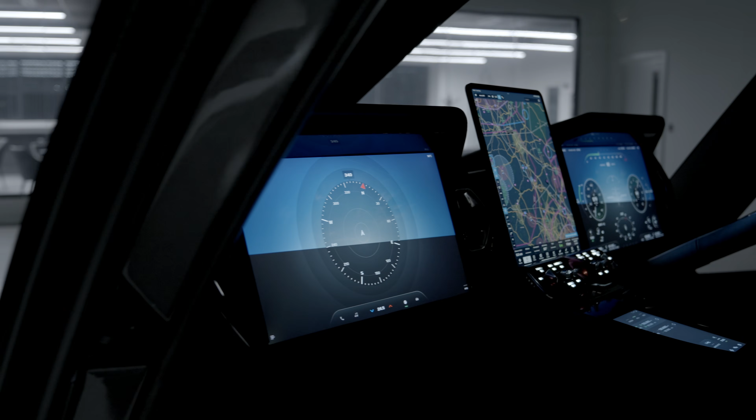Our beautiful HX50 makes you want to fly, and by manufacturing everything in-house, we make it affordable so you're able to fly. Together, we're creating a general aviation renaissance. We call it GA 2.0.

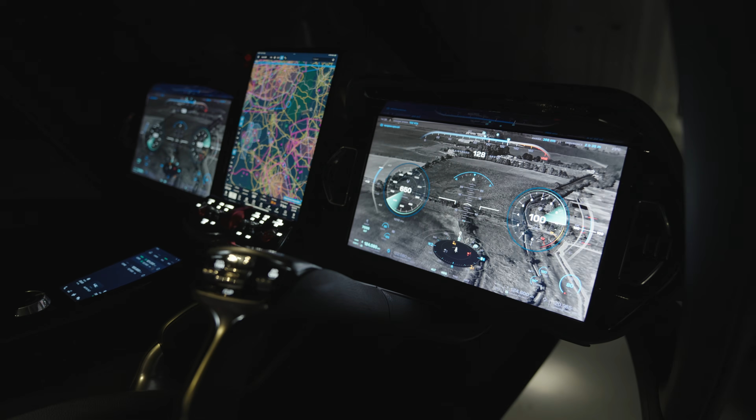For you, it means a breathtakingly beautiful new aircraft, ready for sustainable aviation fuels and connected for the modern world. Our all-new ownership operating system supports every aspect of HX50 ownership, from in-house insurance to comprehensive warranties and power-by-the-hour maintenance to pilot training and active safety management, keeping you and your family safe.

Together, we've built the Hill Global Community, a place that provides easy access to the very best that the helicopter lifestyle can offer, globally and amongst new friends. Clearly, the scale of this task is vast.

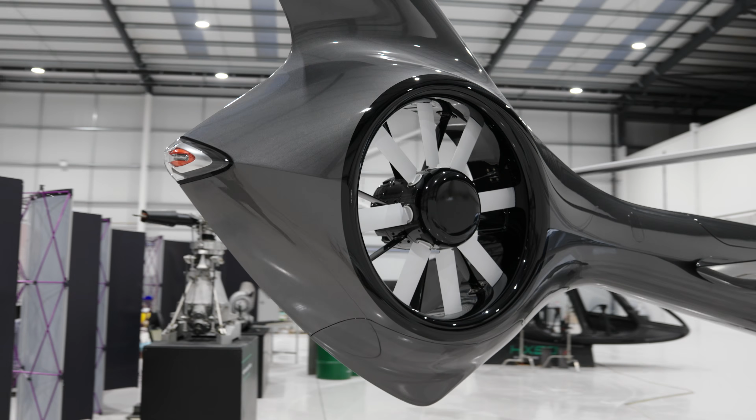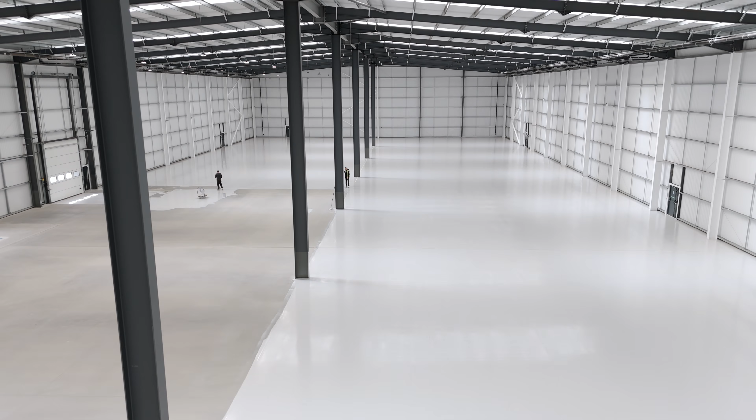Create an all-new class-leading helicopter. Create a pioneering, affordable turbine engine. Create an all-new digital cockpit. And then create all of the processes and all of the infrastructure needed to manufacture every single part. Then build it, test it, and approve it. Tonight, we'll showcase all of the progress from across the program on how we're delivering on each of those objectives.

Producing a next generation turbine engine is a very big deal, but not because it's difficult. It's because it's absolutely crucial to being able to deliver next generation light aircraft at commercially viable prices.

Consider this: there's less than £10,000 of expensive raw materials in an engine of this size and type. And the equipment to make these components has never been more readily accessible. And we have it all right here at PC1.

Sure, these machines are complex and extremely highly strung, but the design, analysis and testing equipment and the knowledge that we have available today right here at PC1 far exceeds what the guys that did this originally back in the 60s, 70s and 80s had available to them.

That's not to downplay the difficulty of the task. This is difficult, this is complex, this will take time. But before we even start, we know that this has been done before. We know how to make this work.

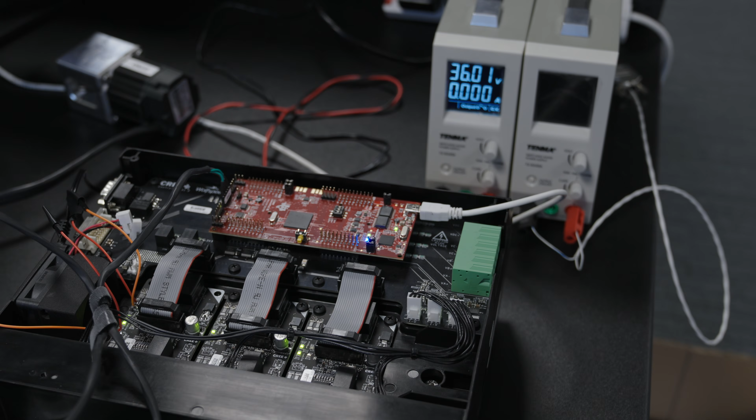Unlike traditional engines, the GT50 uses a high-speed, high-frequency, high-voltage direct drive starter generator unit. This unit consists of two groups of components: the mechanical assembly, which includes the rotor, the stator and the casing, and then the power management unit, which is all the electronics, hardware and software that control and operate the device.

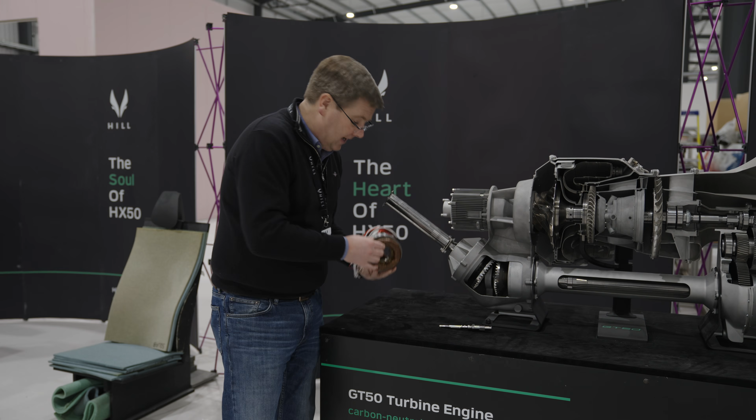We've now completed the prototyping of the drive shaft. This is the stub shaft that sits on the end of the gas generator and drives the rotor of the starter generator. And then also the stator and windings, so the laminations, the windings, and the wire terminations that come out of the back of it.

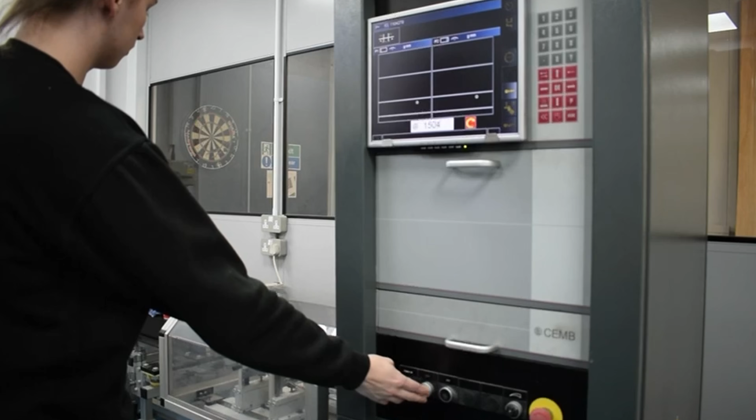And with those in hand and the final casing currently on the 5-axis machine, it's time to assemble it and test it. Given that the starter generator runs at 50,000 RPM, it's important that the system is both statically and dynamically balanced to ensure smooth running and avoid harmful vibration.

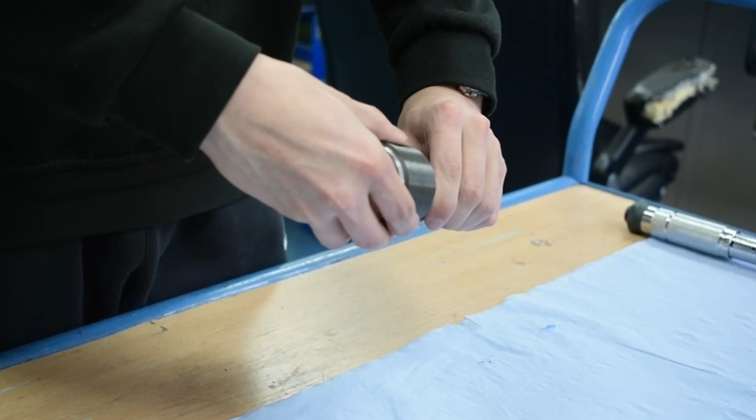In order to do this, when we designed the rotor, we built additional areas of land on all of the rotating parts that can be subsequently machined away as the system is both statically and dynamically balanced prior to assembly and use on the test rig.

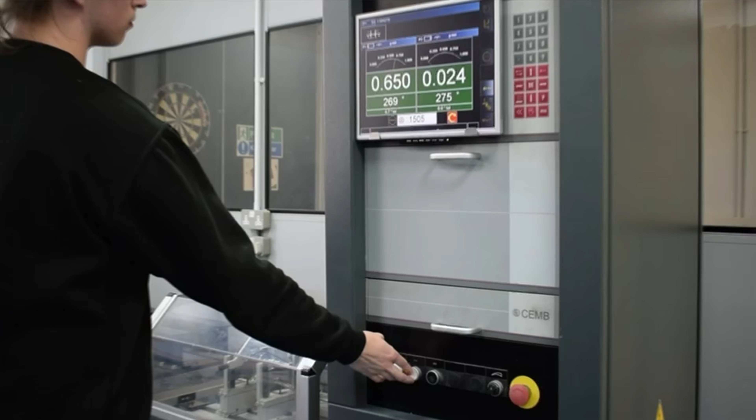With the rotor balanced and the stator electrically tested, the system can be assembled with its casing and connected to its brain, the PMU. In parallel with the development of the flight hardware, we've also been designing and commissioning the specialist test equipment necessary to test and qualify the system, and then building a lab around it.

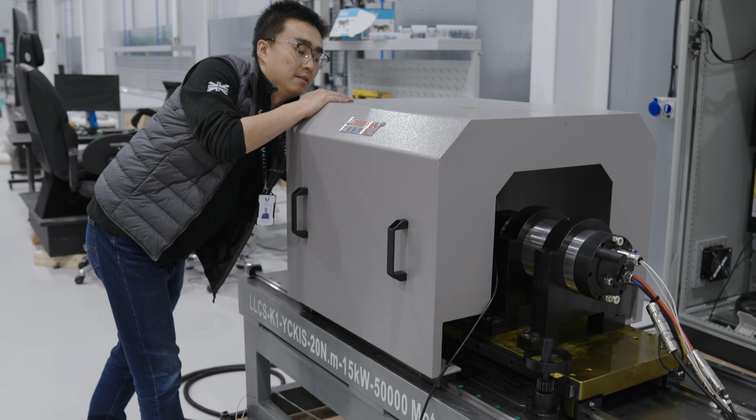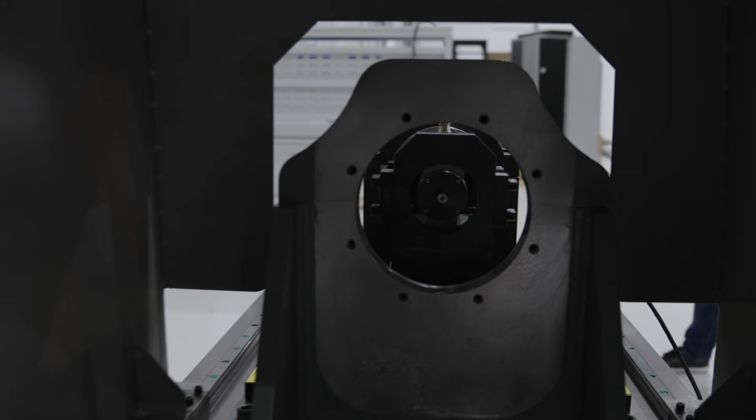And here it is. This is our fully commissioned high-speed test rig, which is about to start testing the motor and generator functions of both the mechanical and electronic hardware of the starter generator.

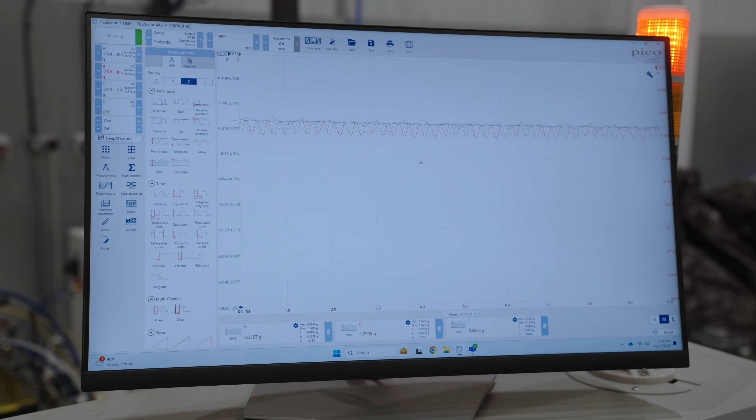This system allows us to prove every element of the performance and reliability of the starter gen across a wide range of operating conditions. Over the course of the next 2 weeks, we'll be mounting the first prototype starter gen system on the test rig and running the system throughout its entire performance envelope.

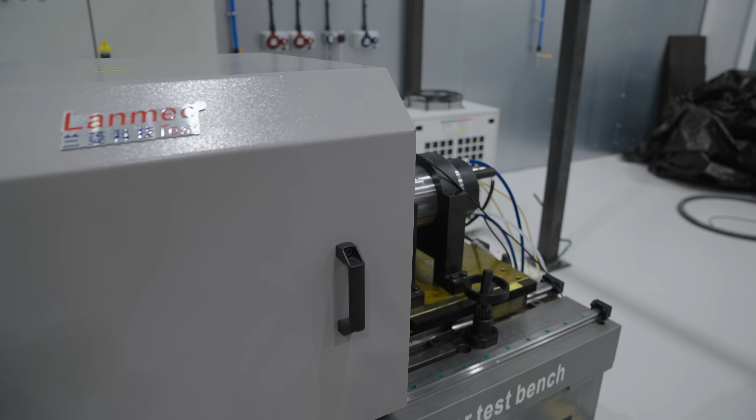This major milestone marks the first module of the GT50 engine on the test bench and working. Much of the time to date on the GT50 program has been spent developing the core elements of turbomachinery, because these are the elements that consume the most technical resources and take the most effort in manufacturing, process development, and infrastructure development.

With these elements of the engine now maturing nicely, we've turned our attention to developing some of the ancillary systems that are also required to make the engine function properly. If you look at the front of the engine and the general state of dressing of the engine, you'll see much more equipment mounted to the front and around the engine to serve the various systems on board. Let's start by having a look at the lubrication system.

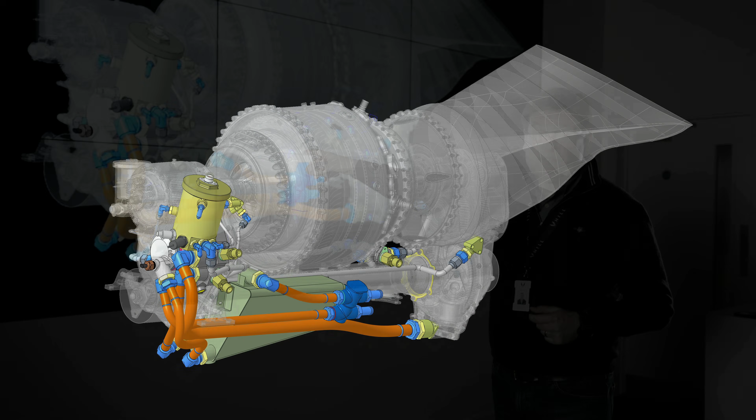Looking at the front of the engine, you can now see that we've added the lubrication system hardware to the accessories module. At the front of the engine, you can see the yellow filter body, the oil pump tucked in behind it, the oil distribution and scavenge lines, and then the oil tank at the bottom of the engine.

The filter body at the top contains multiple functions. It acts as the oil filter itself. It has the oil filter impending blockage warning flag, the pressure relief valve, and also the oil-fuel heat exchanger, which cools the returning oil and heats the fuel prior to injection into the engine.

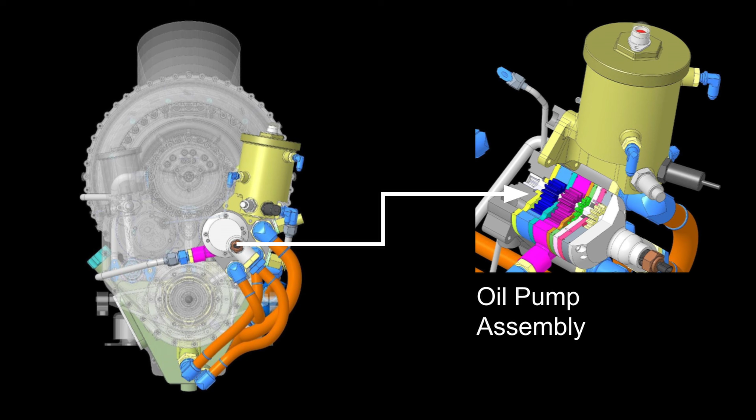When you look across at the oil pump just below the filter body, you can see we have a 4-chamber gear pump, which provides one pressurized line of oil to distribute it to all of the injector nozzles and jets around the engine, and then 3 separate scavenge lines that pull the returning oil and oil mist back from various locations within the engine and into the filter body.

The oil tank itself is conveniently located at the front lower side of the engine and contains around 5 litres of oil, which is enough for all reasonable operations.

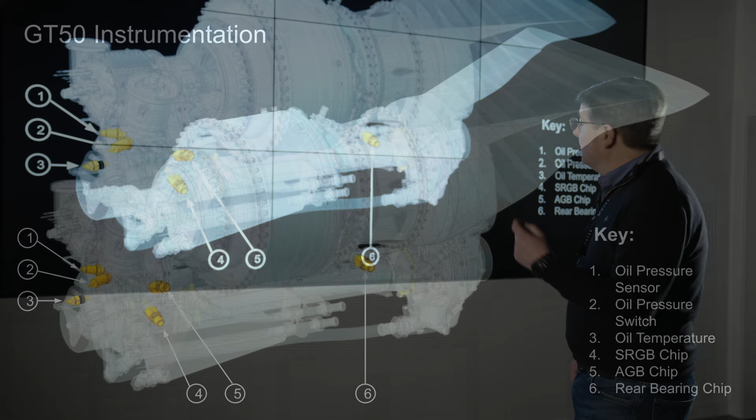In addition to the lubrication system hardware, we've also now integrated the key sensor elements for the control and instrumentation system. On this image you can see the oil pressure sensor, the oil pressure switch, oil temperature gauge, the speed reduction gearbox chip indicator, the auxiliary gearbox chip indicator, and the rear bearing chip indicator as well, all conveniently located around the engine.

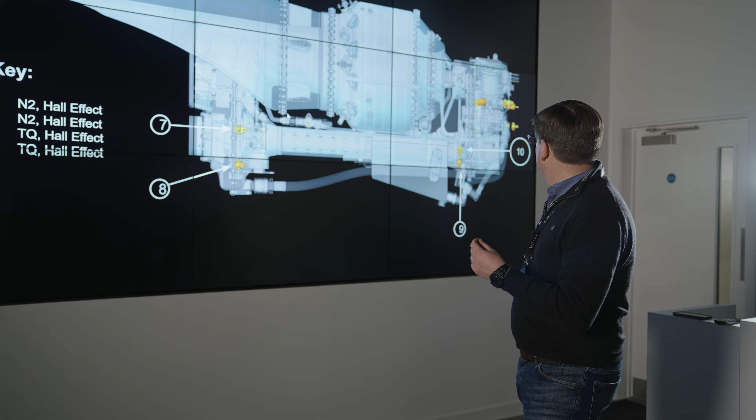In addition to this, we've also got the Hall effect sensors for N2 that are used to pick up the N2 speed, as well as the Hall effect sensors that pick up torque by looking at the distortion of the drivetrain throughout the engine. We've also integrated the engine mounts both at the rear and the front end of the engine to secure GT50 to HX50.

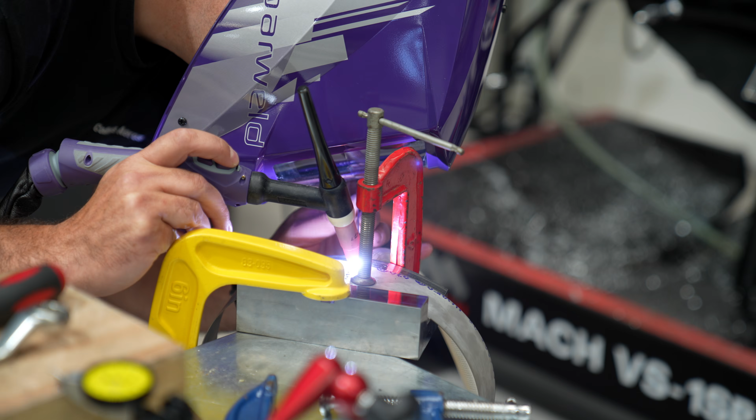GT50 uses a modern annular combustor comprising roll-formed, superalloy, laser-welded, interlaced rings. We featured the production of these rings and the development of those processes extensively in previous updates. Now, it's time to bring all of that together.

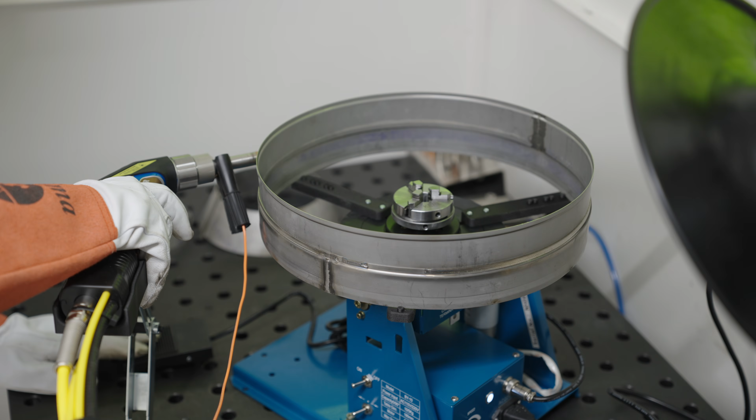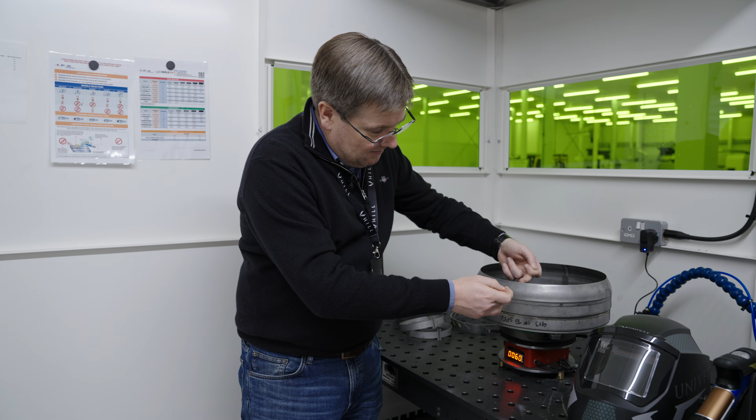Welcome to our precision laser welding facility here at PC1. Over the course of the last few weeks, the guys have been focused primarily on the processes necessary to take the individual rolled rings, assemble them in a welding fixture, and create perfect, repeatable, gas-tight welds between each of the layers of the rings that make up the film-cooled combustion sheeting every time.

These processes are traditionally extremely labour intensive, so we've been focusing very much on how to jig and fixture these components so that we can subsequently automate them and eliminate the labour content, making the GT50 combustion system as cost effective as possible.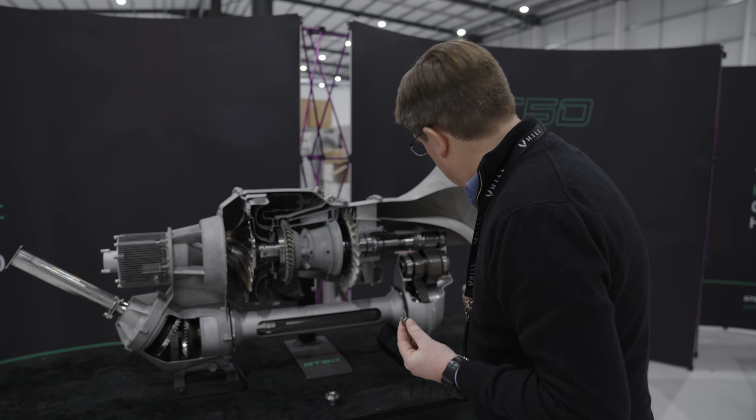One seemingly innocuous part of the GT50 engine that's crucial to the performance, efficiency, emissions and reliability of the engine is the fuel injection nozzles. Although these components are very small, their internal geometry is extremely intricate, and the conical shape inside that nozzle, not dissimilar from the internal passages of a funnel, is absolutely crucial to delivering the cone angle of spray we require, the mean and distribution of particle sizes as it atomizes, and the flow rates we need to guarantee both the minimum and maximum flow through the engine.

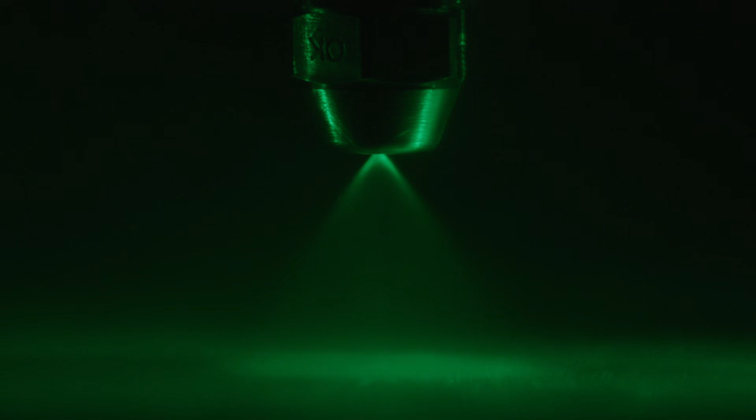In order to develop these to the point where we can freeze it for production, we've been doing a series of tests on our laser visualization rig to measure the cone angle from the nozzles, measure the flow rate, and to study the atomization properties of a variety of geometries very close to the target geometry for the GT50 nozzle.

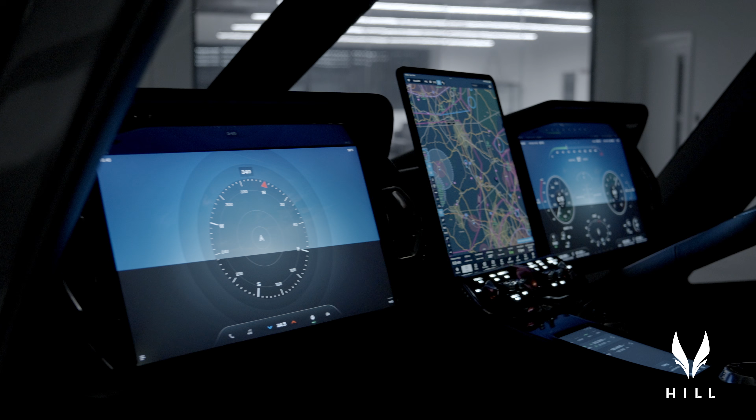Today marks another important milestone in the development of HX50. We've now frozen the primary flight display design for the digital cockpit, meaning that Eric and his team can now get on with the important business of implementing this software on the target hardware, ready for testing before year end.

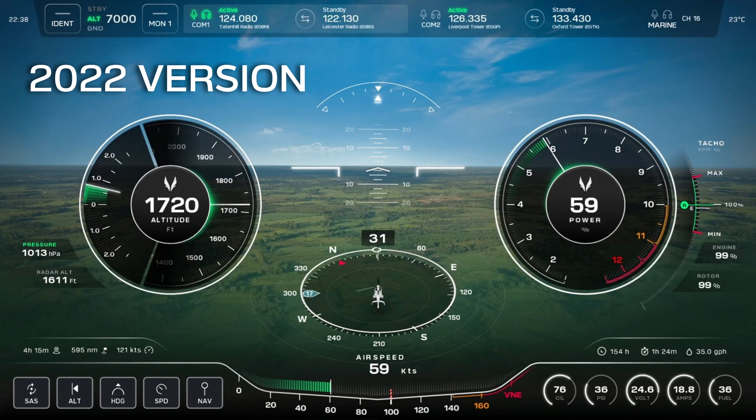The design itself has gone through numerous iterations over the course of the last 2.5 years, gradually evolving from piloted flight tests, customer feedback, and a consistent pursuit of perfection in terms of combining the best elements of traditional analog gauges with all of the benefits of modern digital displays.

The production version of the PFD is crisper, cleaner, and more refined than ever before. Airspeed is now conveniently positioned at the top of the display with a simple curved arc giving a needle as well as a digital display.

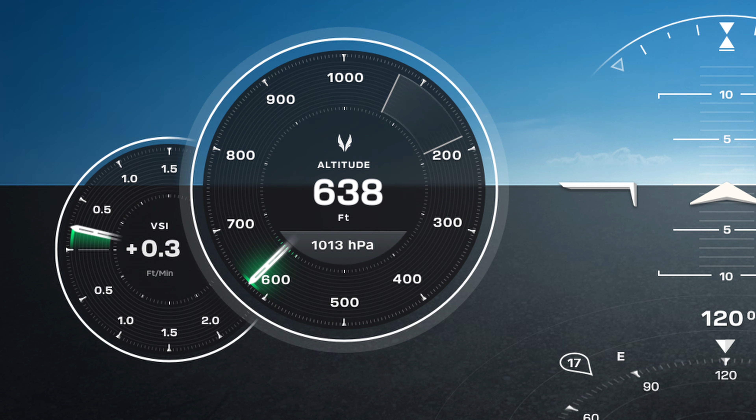Our new and novel altitude indicator brings the best of analog gauges and digital readouts while only using one needle to present your altitude, irrespective of how high you are above sea level. This is combined with a large, easy to read vertical speed indicator and the large power indicator that's always been a primary feature of the Hill digital cockpit.

The rotor and engine tachometer are now crisper, clearer, and more easy to read than ever before, with the engine temperature and electrical gauges provided at the bottom of the screen and a homogenized communication and transponder bar.

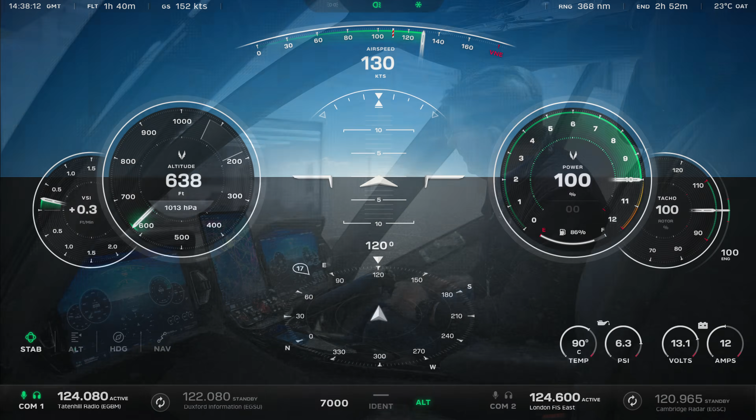As in previous designs, we've also got the pass-through layer that provides video footage as a background from the camera installed in the nose of the aircraft. And the colour schemes have all been adjusted to work perfectly with this.

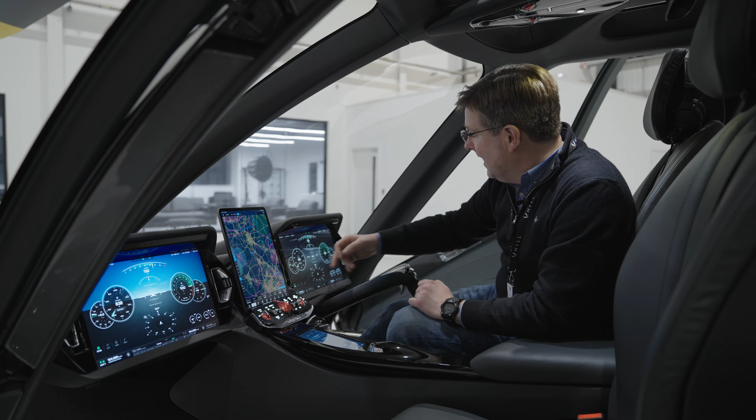We've also provided a toned down night theme that makes the contrast more appropriate for night flying so as not to glare in low light environments. And then finally, we've also integrated the infrared pass-through layer to make flying at night safer than ever before.

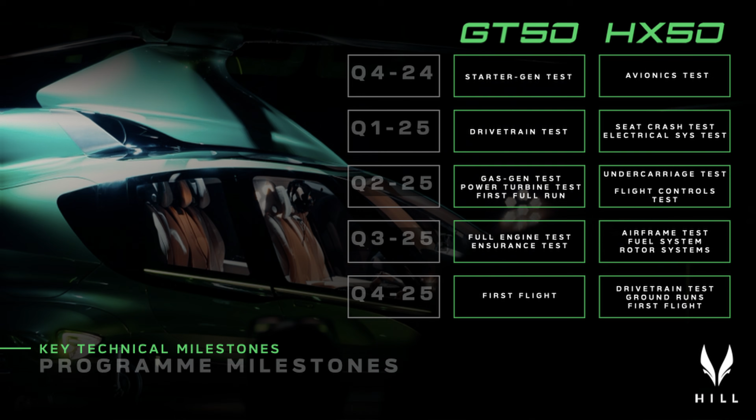Tonight, we've shown you that the starter generator is being built right now, the test rig's ready to go, and the starter generator testing will commence before the end of the year as planned.

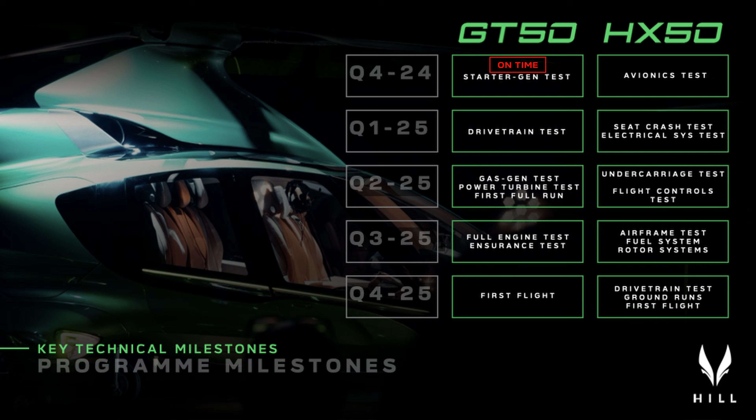Similarly, the avionics PFD user interface has been frozen, the system is being built in the avionics test lab upstairs, and again, testing will start before the end of the year as planned.

Early next year, the electrical system, the crashworthy seat, and also the drivetrain will start testing as planned. All 4 deadlines on schedule, on time.

We set ourselves an epic challenge: build the finest 5-seat helicopter ever, which in turn needed the most cost-effective light turbine engine ever. To do this, we've had to vertically integrate an entire aerospace supply chain. Sounds like a tall order, and it is.

But our factory will be home in time for Christmas. GT50 will run for the first time by the 28th of June 2025, and HX50 will take to the air for the very first time by the 20th of December 2025.

GA 2.0 is coming. 2025 is our year.